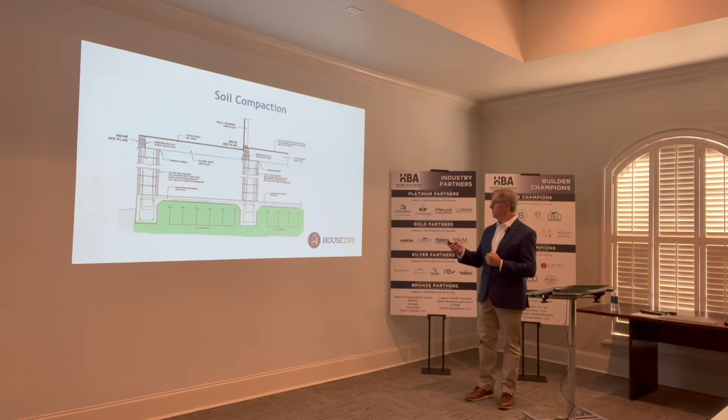So today we're going to focus on foundations and, oh, here we go. Whoa, going the wrong way. So we're going to talk about some load applications and management. I want to talk about soil compaction, the preparation before we really get started with it. Some footing plans and some attention to detail.

These two segments here, this is where I'm going to introduce these concerns, and I don't really talk about it that much more, but in the attention to detail for your foundation, I'd suggest really looking at chasing some of the dimensions when you start getting into your form work, laying out piers, if you're going to have a cladding on your pier or some accommodation, gutters, those types of things. Try to follow those dimensional details to make the accommodations.

When we see misses, we have brick veneer overhanging foundations or gutters coming right down on foundations or spread footings. That tends to channel water back beneath the house, which creates some long-term systemic issues. So my point of emphasis here is to just check those dimensions and follow your load path right from the roof all the way down into the foundation and into the spread footing.

Check during the installation, check the plumbness of the piers and the piles. Piles left long when they're canted create a real problem when you start bringing the frame assembly into the foundation. We've literally seen some of the beam assemblies start on the inside on one pile and at the next pile be on the outside. So I don't really know the full process of keeping those piles plumb, but anyway, a point of emphasis.

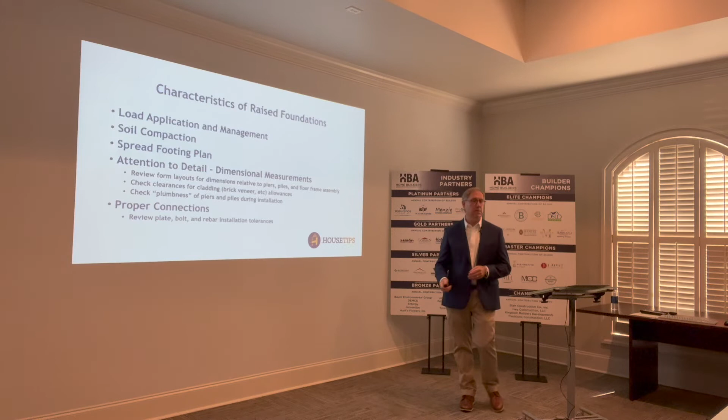I'm a little trigger happy here. Oops.

Let's talk about load applications. This is a simple diagram. If you attended some of my other classes, this is very consistent, but it's a point I want to bring up. For us to get to the reactions in our raised foundations, we need to look at what's contributing to this foundation circumstance. This is just a detail I pulled off of one of our plans for emphasis.

So I think we are all aware that on the building assembly, according to code, we have live loads and dead loads, right? I'm not going to get too far into that, but the live loads are when people move across floor systems or in your attic and so forth. The other thing that I feel is missed commonly in design and in construction, so it's easy to beat up on contractors, but we go through plans.

Gordon is architect trained and a former building official, plan official. So we see where the breaches in the design occur, and they occur a lot. And then the real concern is that contractors make assumptions and continue with the project. So they're, in my opinion, assuming liability.

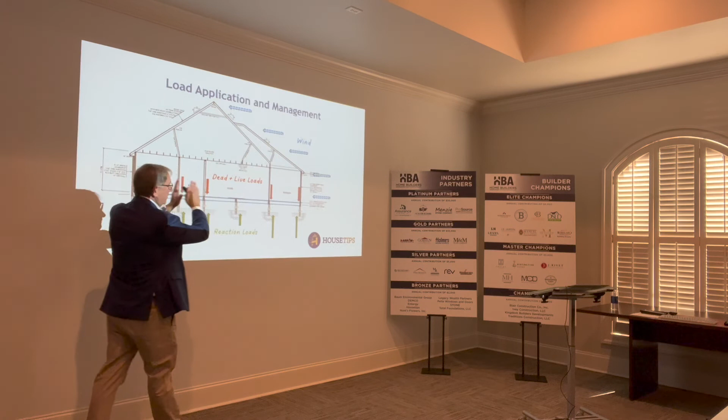But back to this point, when the wind is applied to a building, as we've depicted it here, it is resisted in two ways. One is lateral, which is the ability of the foundation to hold the building assembly in place. That keeps the building from sliding when the wind is blowing in this fashion. The other, more important circumstance is if you fix this corner of the building in the foundation, with the wind blowing this way, it wants to create a moment

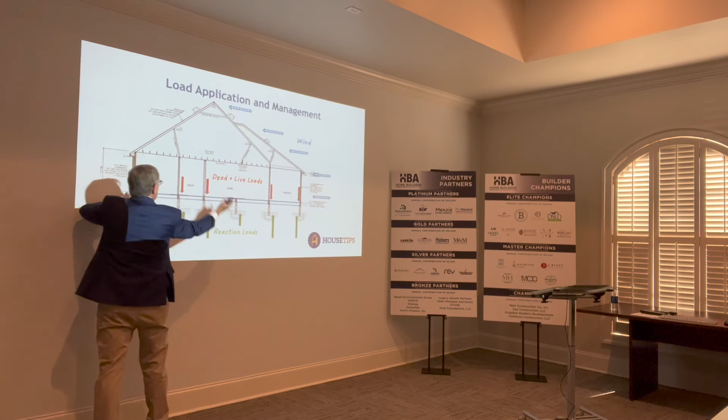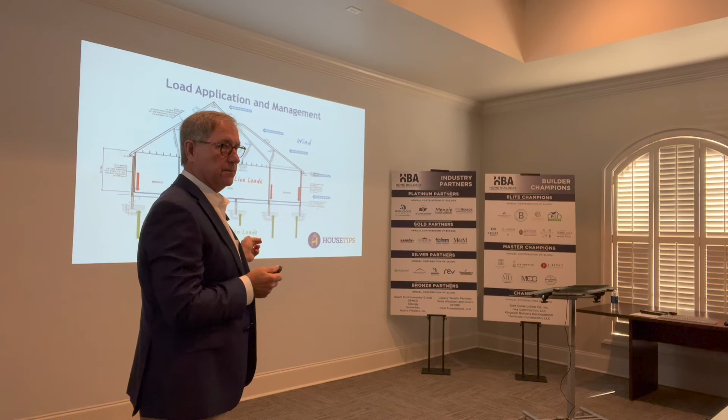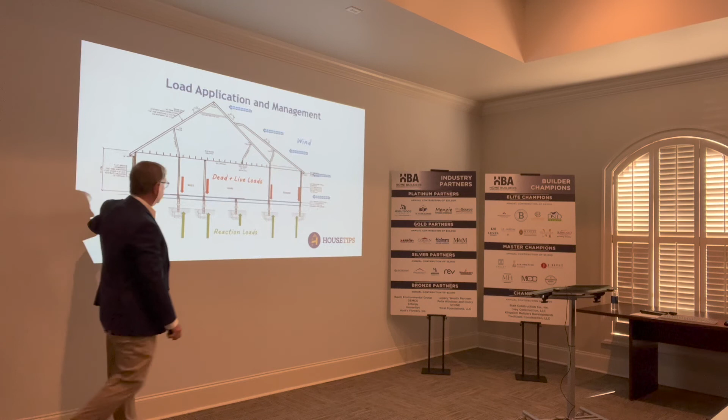and overturn the building. Very rare. In hurricanes, those things happen. We have some examples of that here. But you need to get a sense that those are the types of forces acting on the building. So it's going to be putting a lot of pressure on the far side of the wind forces. Can you understand what I'm trying to say here? And we'll show you some examples when that system fails.

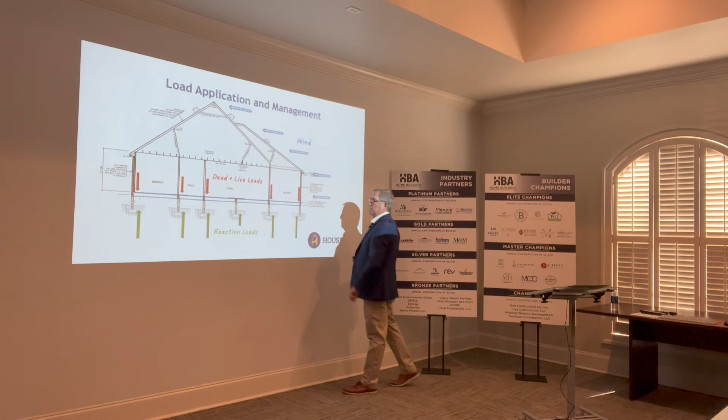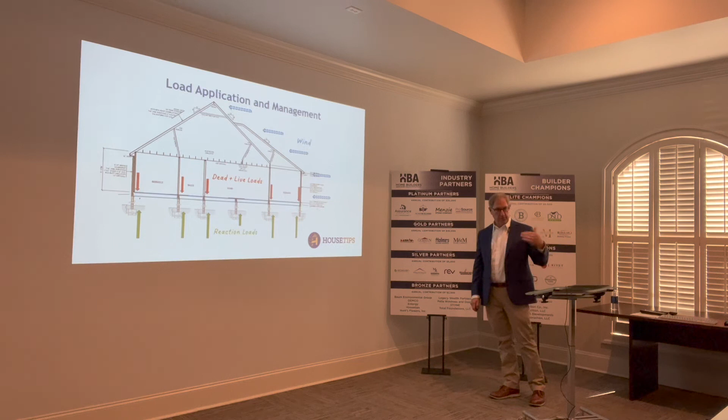Now, these reaction loads are related to soil pressure, and we'll talk about that in just a second, which gets back to soil compaction, a circumstance that I want to learn from you guys about how that gets accomplished on your projects.